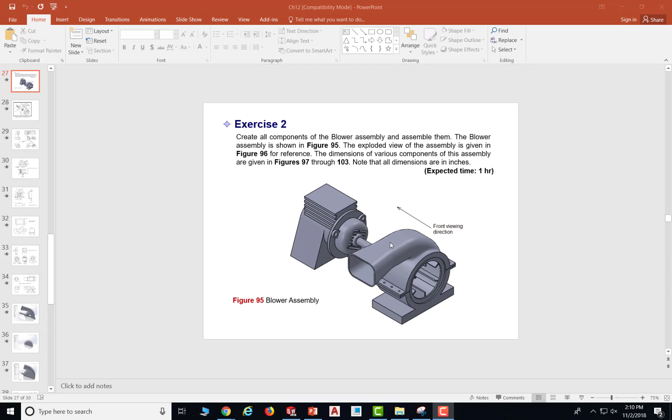Hello everyone. Now we are going to show you how to use SolidWorks to make this blower. This is chapter 12, exercise 2, and today we are going to show you how to make the upper housing, which is this part. So we're going to use SolidWorks to make this part. Once again, it's chapter 12, exercise 2.

Let's go to SolidWorks to take a look at the part. So this is the part we're going to make. And let's take a look at the steps.

So if I grab it up, first of all we are going to make this base. Then we're going to make this part. And then we're going to make the front part, which is this part.

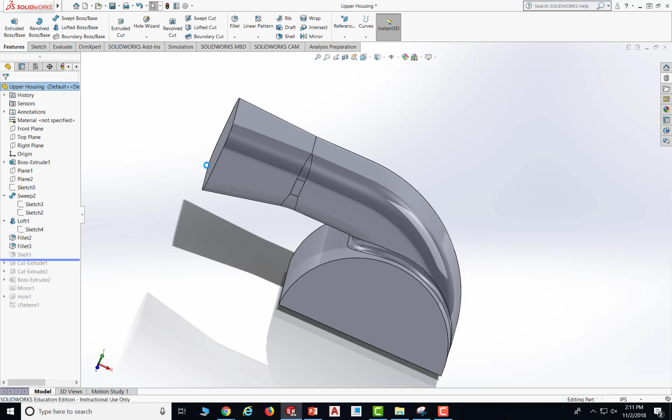And then we're going to create the fillets, so one here and another at the bottom. Then we are going to make the shell, one here and the other at the bottom. So that's shells.

Then we are going to do the extruded cut to make this part, as well as this part. And then we are going to do this part, and then we mirror it to another side. Then also put holes on each side and do patterns to get all holes.

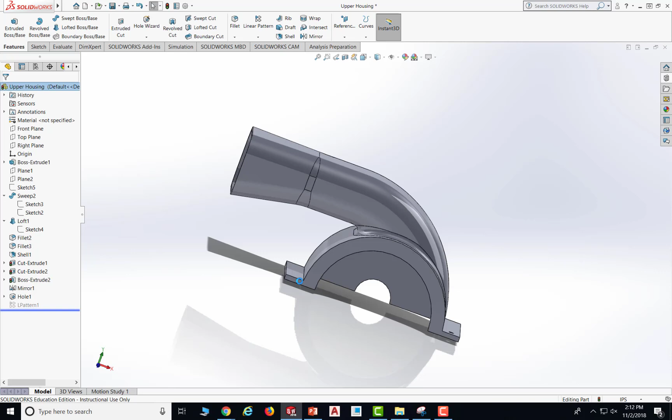So this is our plan. Then let's get it started. I'm going to close this part and start a new one.

Let's go to the dimension and take a look. So first of all, if you take a look at the dimension, this is 5.75 and the thickness is only 0.25. So what do you think about the units here?

Yes, it's going to be English units, not the metric one, because the thickness won't be 0.25 - it's too small. Also, the length of the blower won't be just 7 millimeters. So this is going to be English units. Make sure when you do units, you do English units for this part.

So let's go to SolidWorks and start a new one. Start a new part and say OK. And now we're going to go ahead and change the units from millimeter to inch. You have to do it right now, otherwise you can't change it back. So change to English units.

Then we go to sketch and let's get it started. So the first thing, we're going to make this part. And it looks like it should be on the front plane. So let's go to sketch on the front plane.

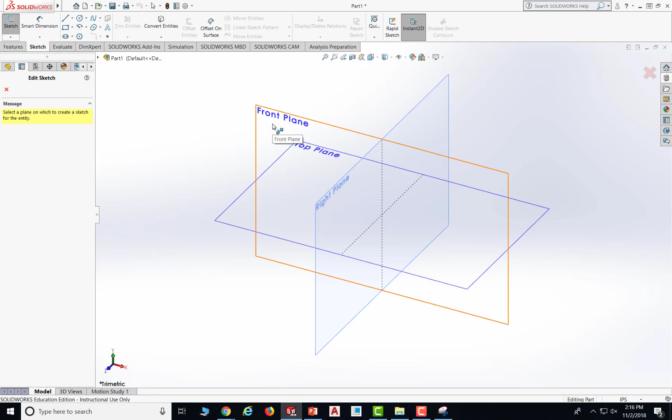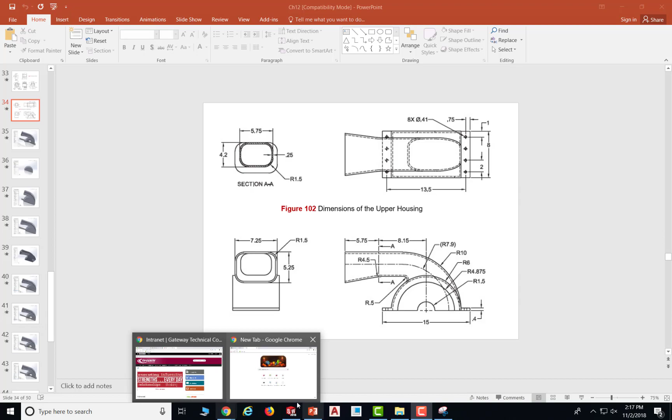Then let's draw a circle and figure out the dimension of that. So the dimension is R6. This is English units again, because the radius of this big part won't be just 6 millimeters. So let's go back here and give a dimension of 6. So the diameter is going to be 12 because the radius was 6.

And let's make a line to connect that, and then trim off the bottom part. But before we do that, let's save the work first.

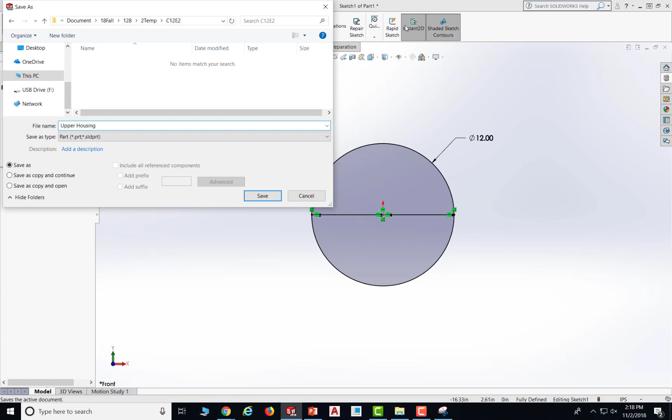So it's chapter 12, exercise 2. And the part number - the part is called upper housing. And save the part.

Now it's saved and also fully defined. Now I'm going to trim off the bottom part and say OK with that.

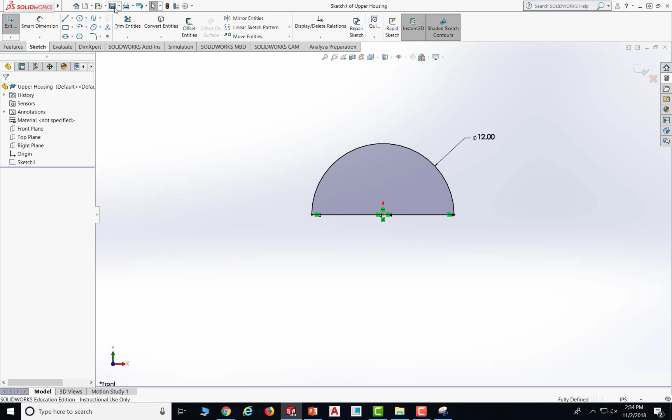Now I am going to extrude. Before I do that, save the work and go to extrusion and select the part. And let's look at the thickness, and go back to the slide.

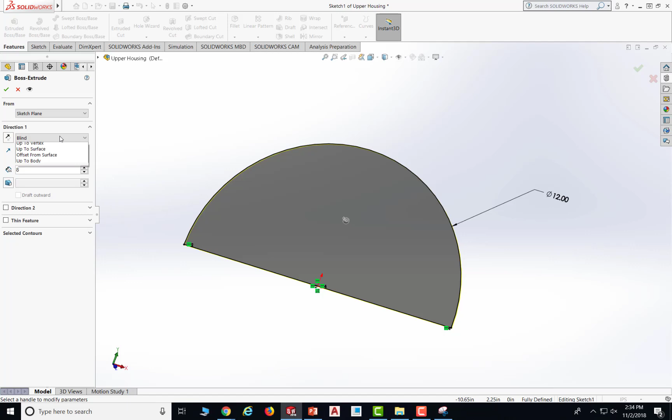So the thickness is going to be 8. Thickness is 8, and put it in the center plane, middle plane. And say OK with that.

Okay, and then next, let's see what we're going to do next. The next thing, we're going to do the top part. So for the top part, we're going to use a new function called the sweep. And after that, we're going to use a loft to do another part. So first is a sweep.

So in order to use a sweep, we're going to make this part first, this part with the basis. Then we're going to make this curve. So this part is going to be swept along with this curve. Now we're going to make this part and this curve.

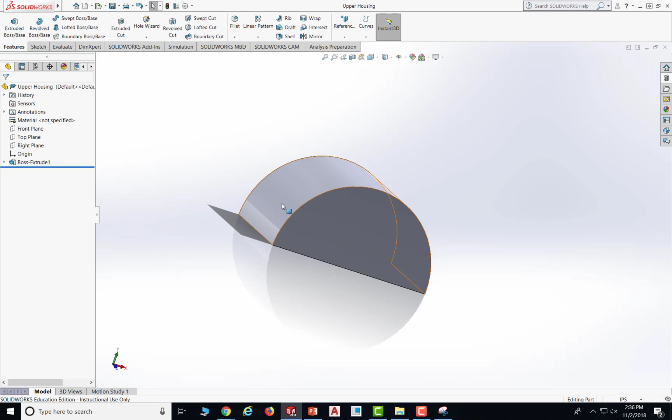In order to make this part, we're going to create a reference plane. Let's create the reference plane first. I go to reference geometry and select the plane. My reference is going to be the right view because the right plane is in the middle, so I am going to select that as my reference. It's on the other side, so I am going to flip the direction. And the distance - let's figure that out. The distance is 8.15.

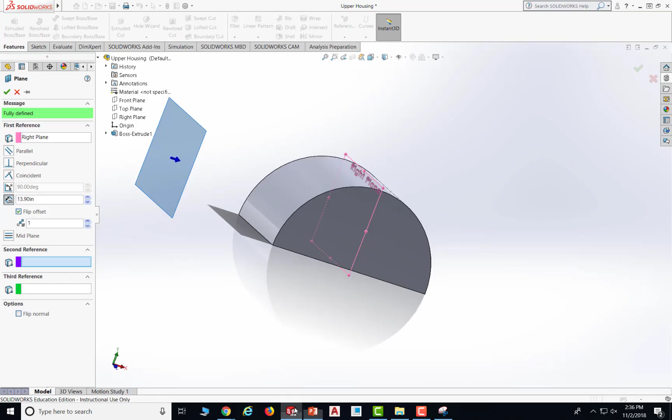So we go back here and put 8.15 as the distance, and say OK for that.

Now on this plane, let's make the square part. We're going to make the smaller part inside because this is the side view, so we see the inside and the outer side. The outer side is this part, and we are making this part right now. Let's look at the inside dimension: it's 5.75 times 4.2. We don't worry about the thickness so far because we're going to do the shell later. So we're going to put this, and the fillets are 1.5. Let's do that.

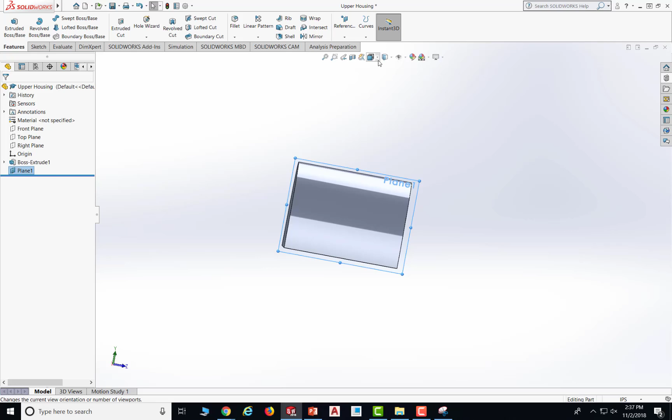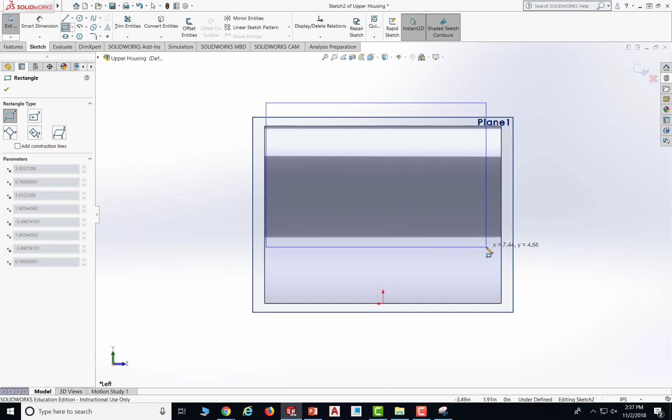Go back to the part. I probably want to use the right side, the left side view in order to see it better. Then I go to a sketch and select a sketch. This is the plane, and I make a rectangle and put it here. Now I am going to dimension the part.

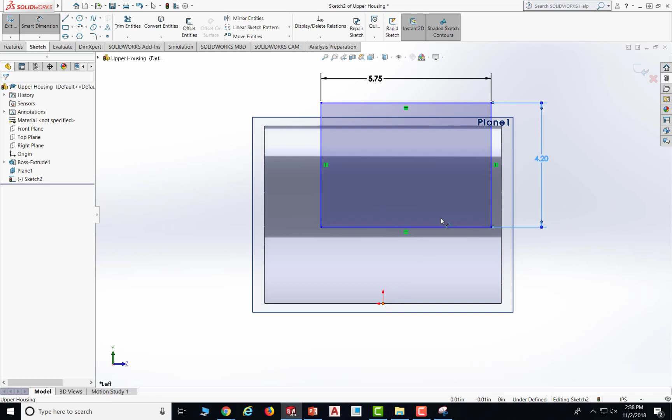So the top one is 5.75 and the height is 4.2, and the half of that, so from the origin to this part, is going to be half of 4.2, which is 2.1.

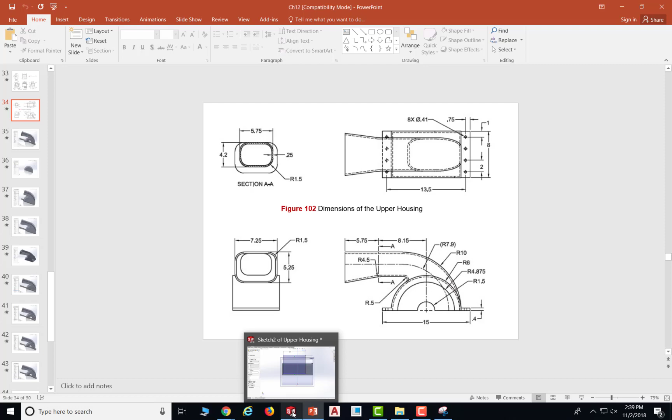Now we are looking for the distance from here to the origin. I assume it's going to be a radius of this circle, so here is an arc. I assume the distance from here to the bottom equals the radius, which is R10. Let's put a 10 there first, so dimension from here to the bottom is 10, and say OK with that.

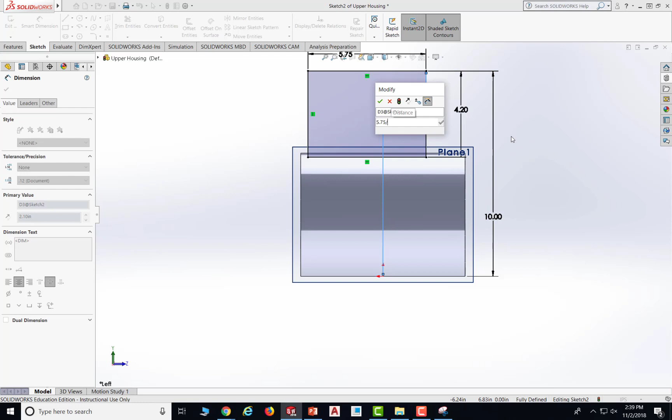Oh, this dimension I messed up. It's half of 5.75, so 5.75 divided by 2. Now it's in the center and it's fully defined. Then save the work.

Okay, and the next part we are going to make this line, make this arc with this line there. Like we said, the radius of this arc is 10, and the center is somewhere, but there's tangent at the end. Let's do that.

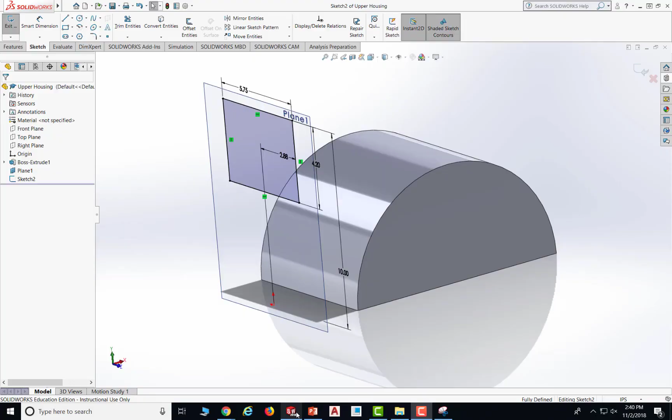I want to go to the front plane again. First I need to exit the sketch, then save the work. Then I go to sketch—it asks me to select the plane. At this time it recognizes the still sketch tool, so I am going to click around and go to features, try extruded, and exit that so I can get rid of the sketch tool. Then let's go back to sketch again. Yeah, now it allows me to pick up the new one.

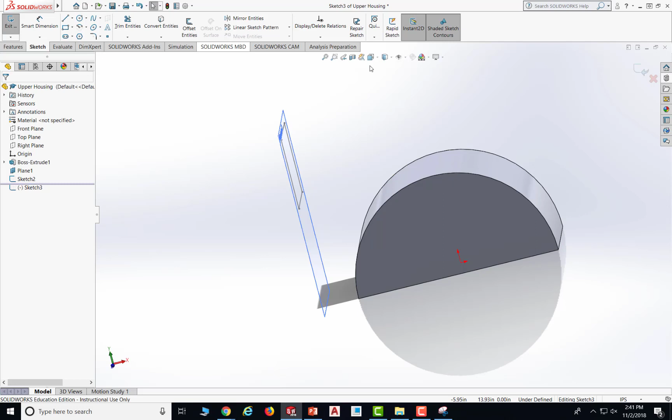I am going to pick the front plane again, then go to the front view. Then draw a circle—the center is somewhere on the point, so just randomly click one and make this tangent. See if it shows up... yeah, the coincidence shows up. That's fine too. Now let's give a dimension with 10 as the radius, so the diameter is going to be 20.

Now it's fully defined. Now let's trim off the part, see if it will work. Sometimes it doesn't, so let's see. So trim off the bottom one—as you can see, if I do that, the entire circle is going to be trimmed off. That's not what I want.

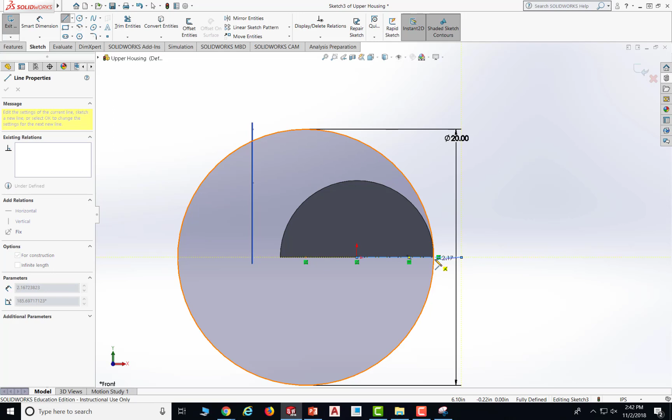Actually, they are looking for the intersection point here, which we don't have. So let's put a center line there, see if it will recognize. Say OK for the trim, then do a center line from here to there. Then we have one intersection point there, another should be there. Let's try it, see if it will work... center line. Yeah, it worked. So to there, then let's trim it one more time. Yeah, now it will work.

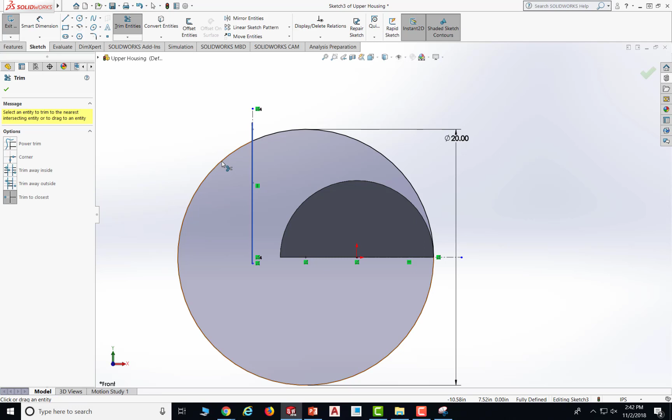So trim off—now we have an arc there, and say OK. Now let's draw a line that is tangent to the top, then maybe this point—make sure the horizontal relation is showing up. Then we have the line here, and the length is supposed to be exactly on the plane. So with that, I probably can delete this part. Go trim—yep, I can trim off this part, and I can trim off this part as well. So trim that off and say OK.

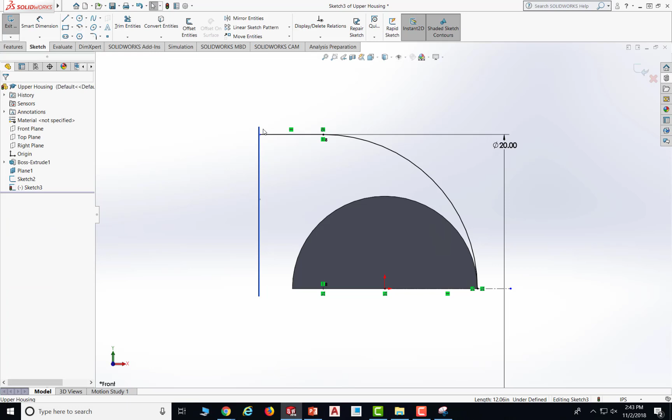With that, I probably don't need the center lines anymore, so I'm going to delete it. Now the sketch looks good, and it's underdefined—I guess it's probably because of that point there, it doesn't recognize. Let me save it first, see if that point is still blue. Go to the sketch.

Okay, I'm trying to go out of sketch first, then go into the sketch one more time. Let me hide that plane. Okay, so this is blue. Now let me drag it around and see if I can recognize it. Now it's black, great. Then save the work.

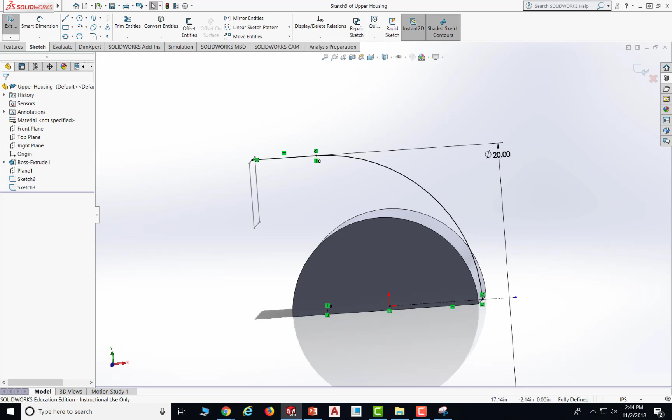Now I have not put the fillets there yet. So I am going to go ahead and put a fillet. Select the sketch tool and see if I'm on that sketch, and do a fillet. It's asking me to select the sketch, so let's select the sketch tool so we can get in there.

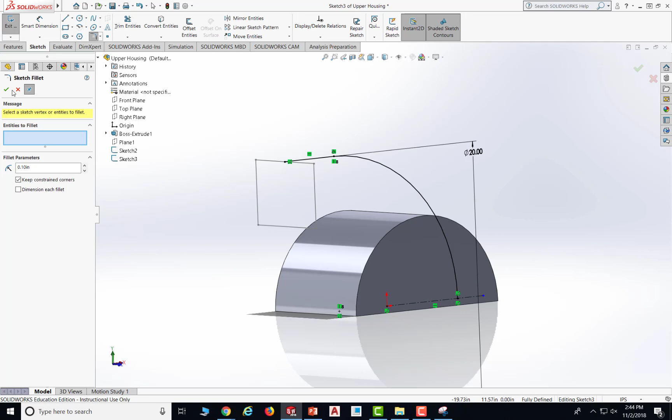Okay, didn't pick, so let me go out first. Then go to sketch, select the plane. So I'm going to select this line, then it was here. Then I add a fillet, so the radius is 1.5.

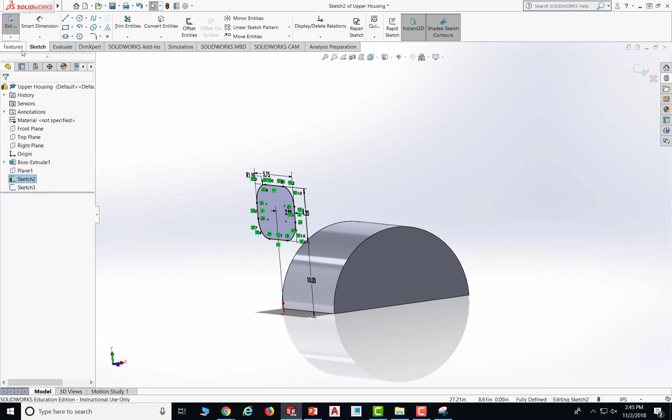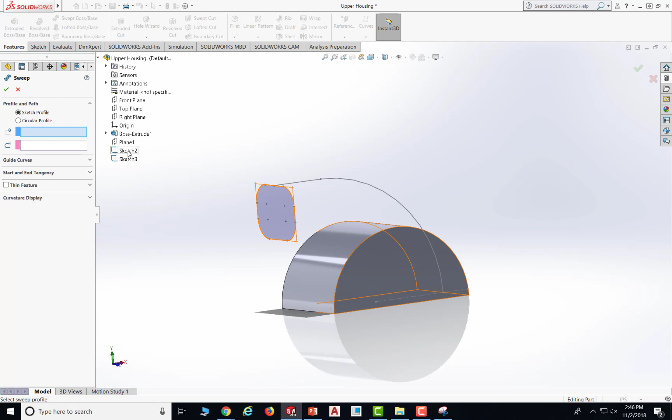Now I could do the sweep. So I do sweep here and select the shape, the profile, which is this. This is on sketch 2, so I'm going to select the entire sketch 2, and the path I am going to select the sketch 3. Then this is what I want. And notice that by doing that, I am going to have all this.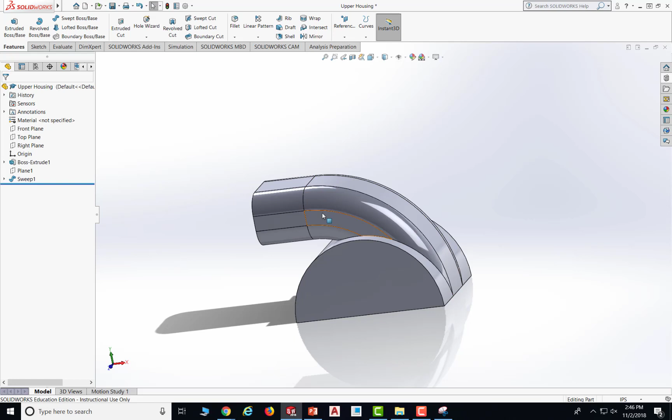Lines here, intersection lines. So the original picture, it does not have that. The reason of that is I use a fillets tool. So in SolidWorks, as long as you use fillets, all these lines will show up. So if instead of fillets you do the arcs and trim off, then those things are not going to show up. So anyway, let's keep it in this way, and let's do the next step.

So the next step, we're going to create this part using a loft tool. Before we do that, we would need to create the sketch of the top part here. So the dimensions, they are here. It's 7.25 times 5.25. So let's go ahead and create this sketch first.

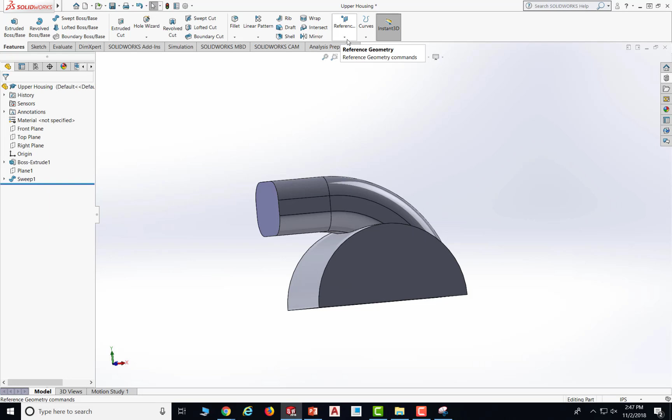And the distance is going to be from the side right view, the distance 5.75 plus 8.15. So let's go to the sketch and create a new reference plane, based on the right plane, with the distance 5.75 plus 8.15, and it's on the other direction. So I am going to flip it to the other side and say OK with that.

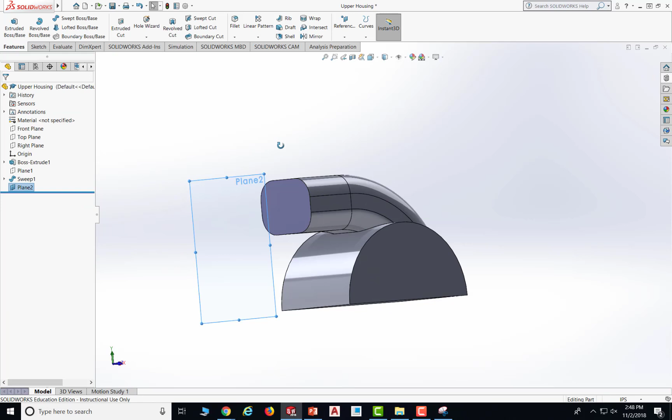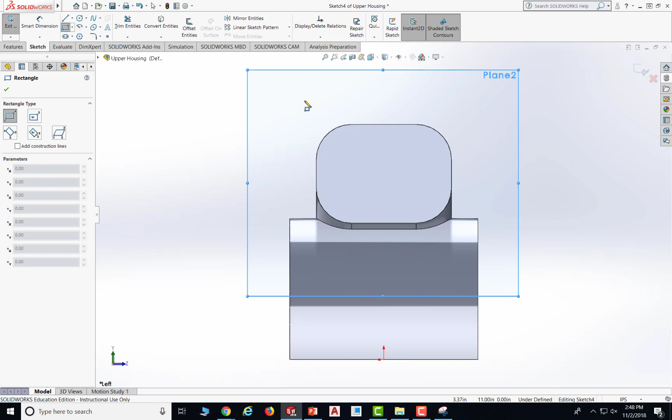And then I'm going to make it bigger so I can put the part on there. And I go to the left view, and I'm going to draw another rectangle. So go to sketch, and it automatically recognizes this plane. Now I select the rectangle and draw it in this way.

Now I'm going to give it dimensions. So the dimension is 7.25 at the top and 5.25 as the height, and a half of that, from this point to this point, is a half of 7.25. So 7.25 divided by 2 is this number.

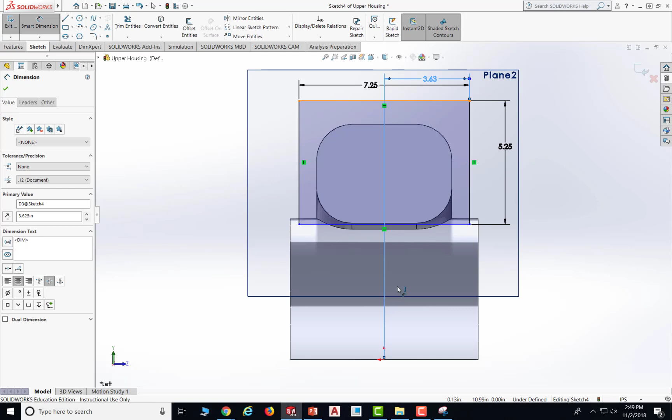And the height, those two are supposed to be lined up. Okay, so the height from here to the bottom is going to be 5.25 as well. So let's go back here. So the height from here to the center, excuse me. So the height from the top to the bottom is going to be the radius of this part.

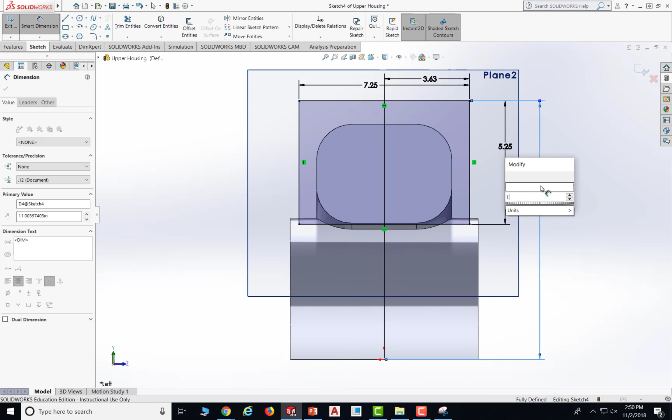So it's going to be 10. Go back here, and the distance is going to be 10. And say OK for dimension. Now they're all black and fully defined. Then let's save the work.

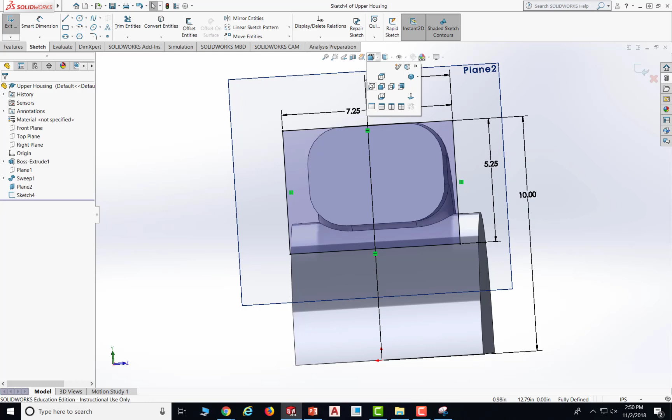Then this is the plane. And now let's put fillets on there. Let me go back to the left view again and put fillets there. And this tool is 1.5 again, so that's 1.5. 1.5 here and 1.5 here. Say OK for the fillets.

And the fillet here. Then we have two planes. And let's save the work. Then we're going to use the lofted tool. So it's hidden because we're still in the sketch. So let's exit the sketch first. Then now this tool is available.

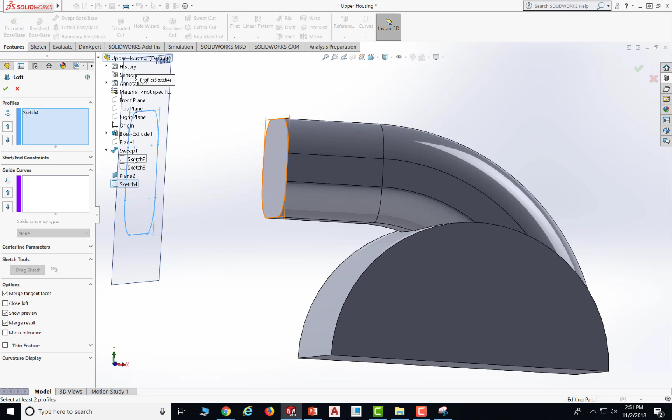So we select this tool and sketch 4. OK, and we also need this sketch, so let's go select that as well. Let's see where it is. So sketch 2, and it's recognized. Let's say OK for that. And this is our part. Looks right so far. And now we don't need this plane anymore. Let's hide that. So this is the part.

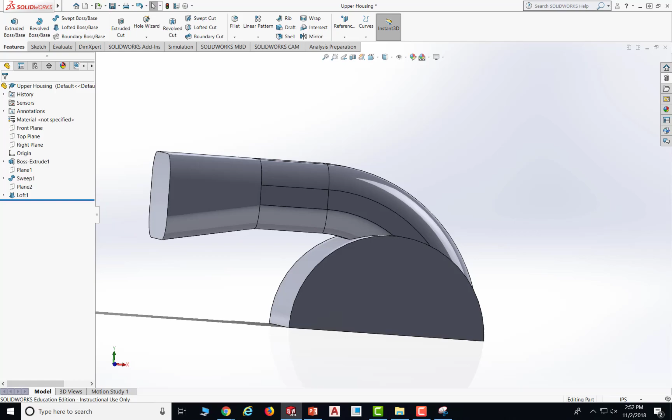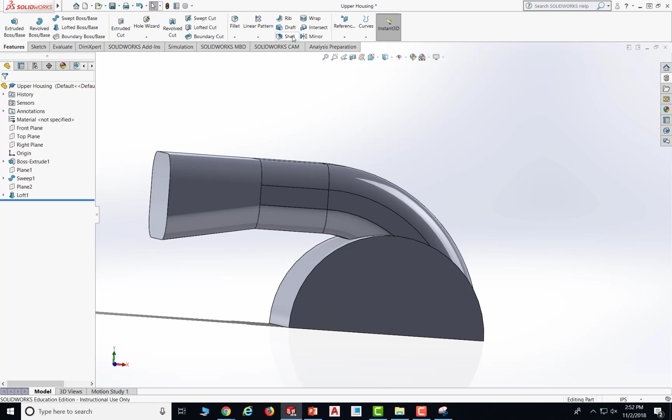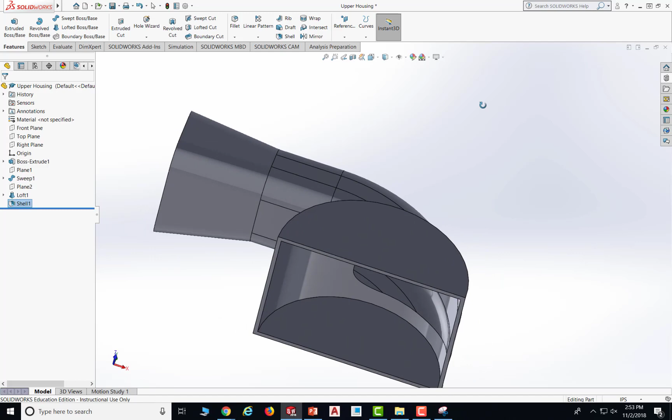Now let's look at the next step. We're going to make the shell at the bottom. So we've done here, and we're going to make a shell, and the thickness of the part is going to be 0.25, a quarter. So we go to SolidWorks, go to shell, select this part as well as the bottom piece, and give a quarter, 0.25, and say OK with that. And this is the shell part that we got. Save the work, and see what's next.

The next one is going to be put the fillets there. So we have a fillet here, and we have a fillet here. Let's figure out the dimension for the fillets. The fillet at the top is 4.5, and the fillet down there is 0.5. Okay, let's go ahead and do that.

So the fillets there, let's go to fillet and select those lines. This and the entire one, okay, recognized. So let's select the loop. Yeah, looks right. And give fillet, so it's 4.5. Let's look at the full preview. Yep, this is exactly what we're looking for. Let's say OK for that.

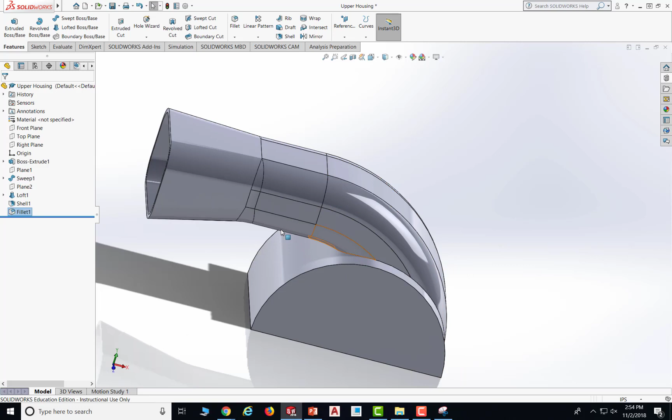Now let's do another fillet here. So go to fillet, and we're going to select this. Oh, it's way too much. Let's do this. Yep, looks right so far. So let's give a radius of 0.5 with the full preview. Probably won't take. Maybe there are two edges selected. Let's apply first, see if it'll work. Oh, it's a FilletXpert, that's why.

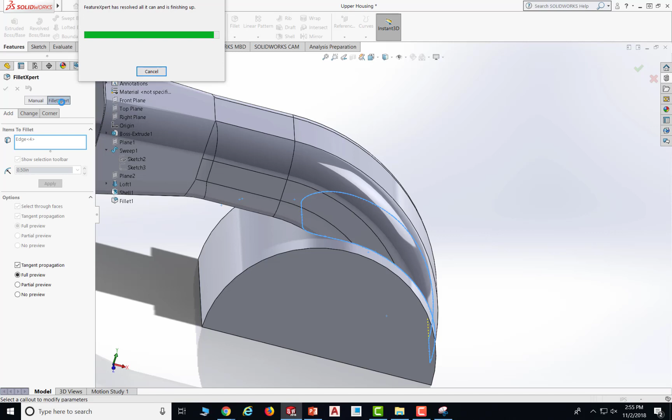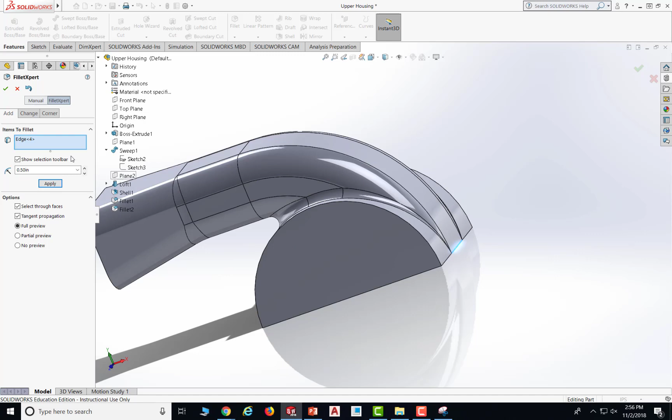Okay, let's wait, it has not resolved all the features yet. Okay, then let's take a look. Looks right so far, then we just accept that. If it does not work, then you could go back to the menu and do the fillets again. Right now it looks right to me, so I just exit and get the fillet there. Let's look at the next.

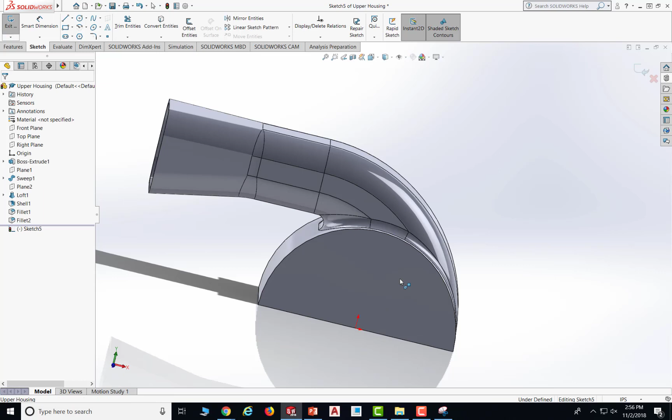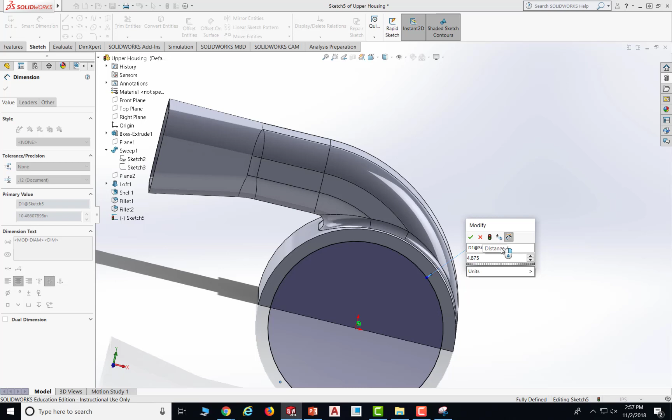Now we're going to cut this part. Let's go back here and go to sketch, select the surface, this part, and do an arc, from here to there. Let's look at the dimension of that part, it is 4.875. Go back here, smart dimension, 4.875 times 2 because that was radius, and this is the diameter, and say okay with that. Now we have to have a closed shape, remember, so we close the shape here and trim off the bottom piece, say okay with that.

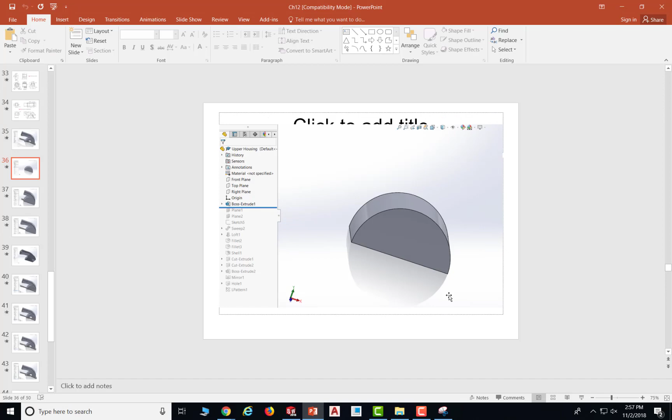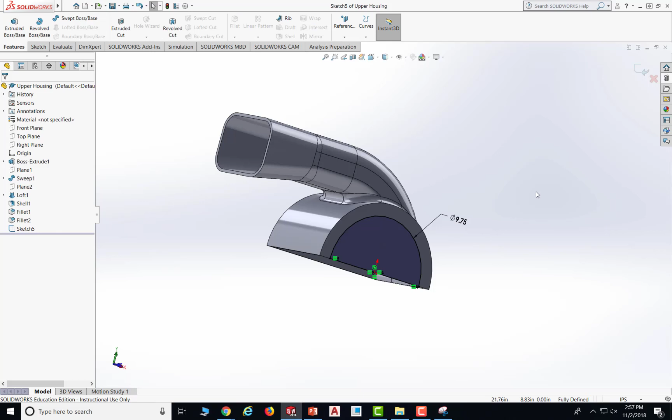Then let's go back to the part, see what it should look like. Okay, so it's not all the way through actually, so let's fix it. Save the work first, then let's go to features and do extruded cut. It's not all the way through like we said, so we probably want to go up to the next. Okay, so only cut it here up to the next, and say okay with that, and we got this piece so far. Let's look at what's going to be next.

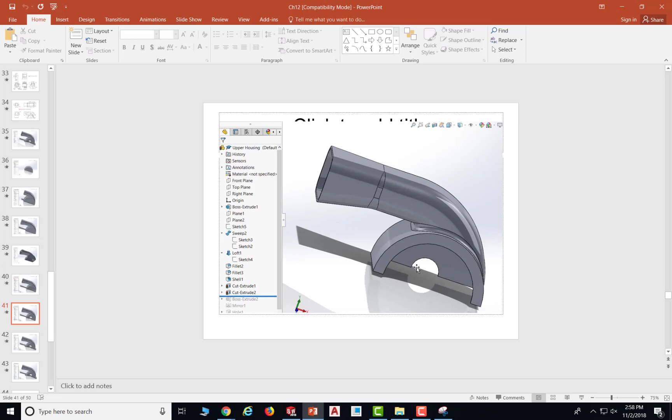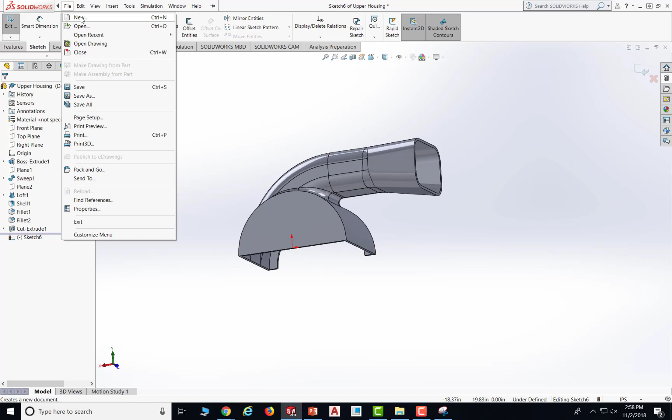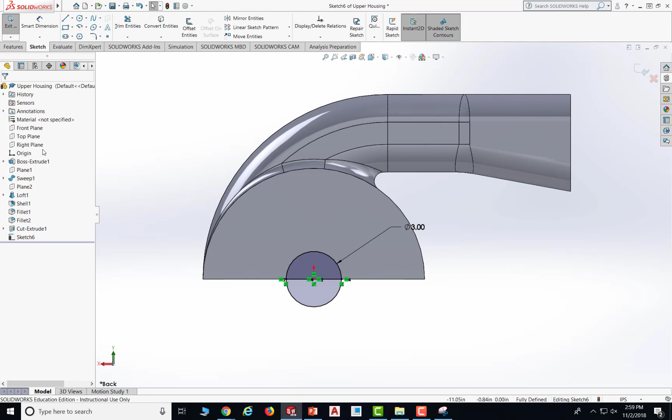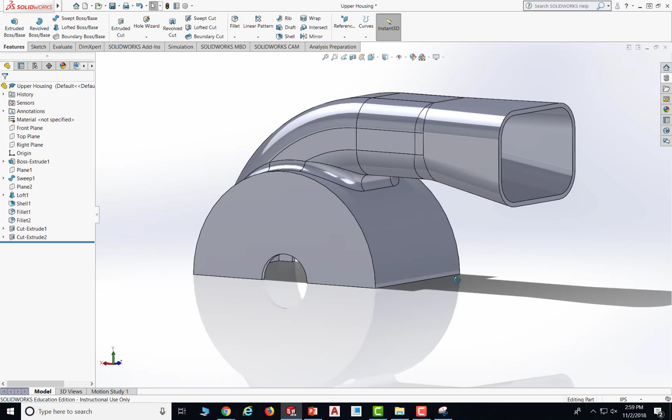So the next one is making the inside one there, and let's look at the dimension of that as well. The dimension is 1.5, let's do that. Go to another side, go to sketch, select the plane, and make a circle. Make a circle, say 1.5. So I probably want to go to the back view, and dimension that as 1.5, so the diameter is going to be 3, and say okay with that, and close the shape from here to there, and trim off the extra piece, then say okay with that. Then go to features and extruded cut, and that direction once again does not go through, so we are going to go up to the next and say okay for that, and we got this piece.

Let's look at the next. So the next one is to make the two side parts. We are going to make one and mirror it. Let's go back here, and now I probably want to select this plane as my new plane. So I am going to sketch, select a plane. Probably want to select, okay, let me see if that was my top plane. Yes, it was. So select the top plane, then probably want to switch to the bottom view. Okay, and make that part.

Be aware, this is a circular surface, not a flat surface. So I probably want to make an extra inside, so when I extrude later, it won't have a gap in between. So I am going to actually make the part land up here instead of right on the edge. Go to the bottom view once again, and go to lines, and probably want to start here. Okay, it doesn't... okay, recognized, good. And go until here instead of the outer one, because when I extrude later, I don't want to have a gap in between.

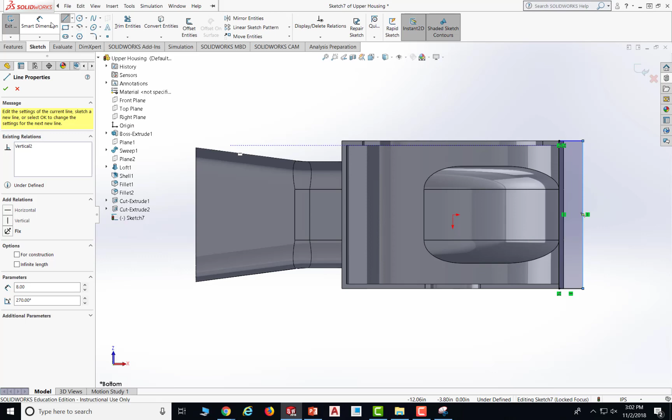So now let's take a look at the dimension from here to the center. Go back here, it's 15 total, so half of that is going to be 7.5. Let's give a smart dimension from the line to the center of that part. It is the origin. Then it's supposed to be 7.5, and say okay with that.

Let's look at this line. It's blue, so let's drag it. Oh, I'm missing a relation, it's supposed to be vertical. So add a relation here. This and this is supposed to be... one more point, delete that. Not vertical, let me redo it. Select those two lines, I'm sorry, perpendicular, and say okay with that. Okay, so they're all black right now, fully defined.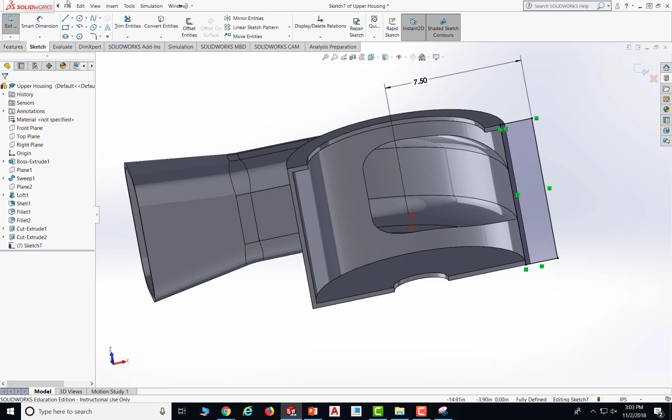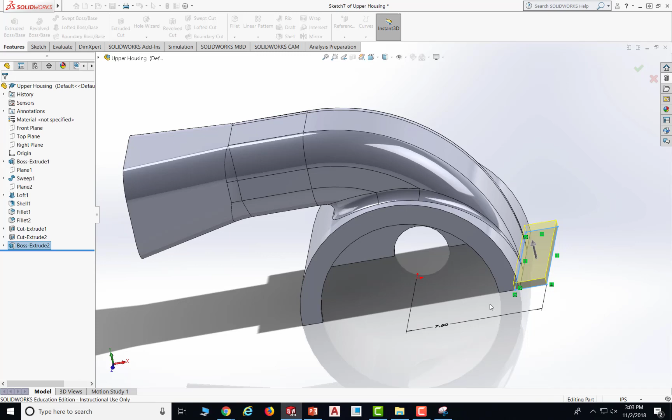Then save the work. Let's extrude, see if they'll work. Go to features, select the sketch first, then extrude. The thickness is going to be 0.4, 0.4 as the thickness, and say OK. Now we don't have any gaps here, which is good. Now let's look at the next step.

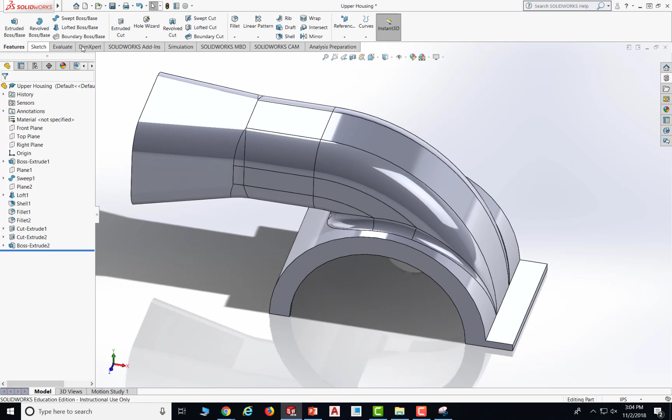I am going to make holes first, then do patterns for the mirror for both of them. So for the holes, let's look at the dimension. The diameter is 0.41, so let's go back here and put a diameter. Go to hole wizard, select the simple hole and put the diameter 0.41, which they don't have. So let's show custom sizing and put 0.41.

0.41, and through all works good for me. I uncheck this because I don't have any of them. 0.41 is millimeter, does not look right. Oh, I need to switch to ANSI inch instead of ANSI metric. Okay, inch does not have the size, so I am going to custom sizing. I am going to put a 0.41 and uncheck this, and I don't need this either.

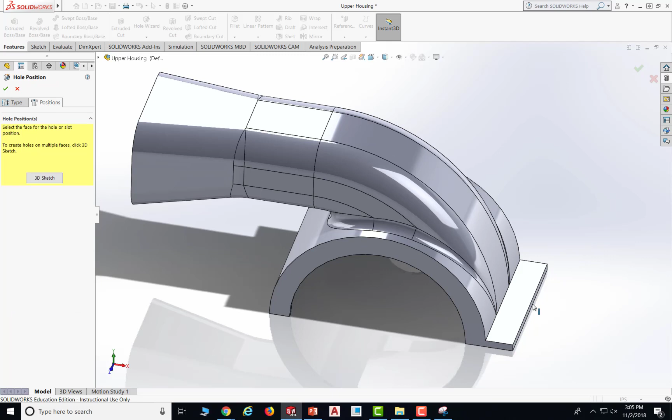Now I go to positions, select the surface, and put one hole here, and now I am going to dimension the hole. Let's find out the dimension. It's 0.75 on the side, and the half of that is... okay, 0.75. Now let's figure out the vertical one. Vertical one is 1. Let's go back here, the dimension from this point to this side is going to be 1, and from here to there is 0.75. Say OK. Now the hole is fully defined, and say OK for the hole.

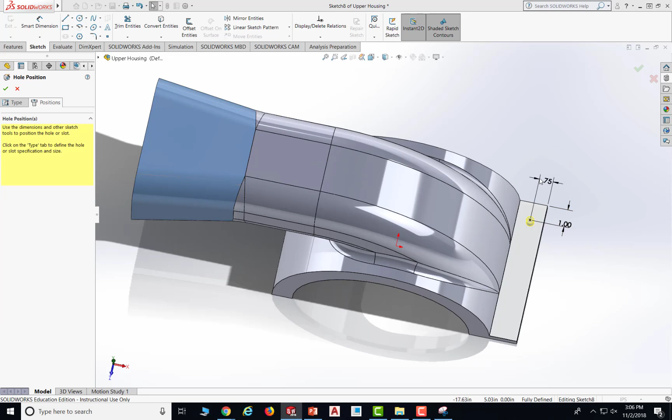Enter the number greater than 0.0 and less than... yeah, I think I did. 0.41, what's wrong with that? Oh, maybe take out inch, let's see. Yeah, still didn't like it. Okay, so let's check the options first to see if it'll work. Still doesn't. Try blind.

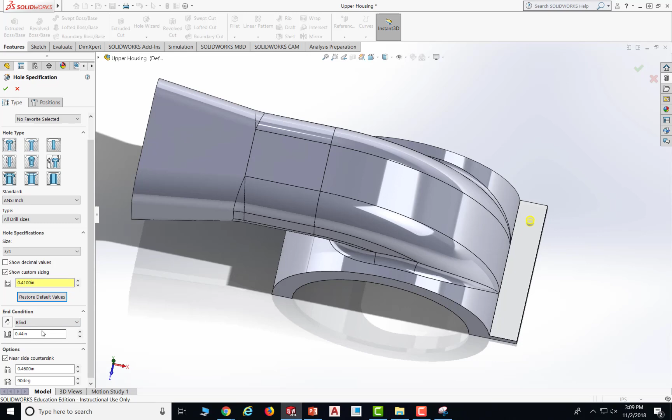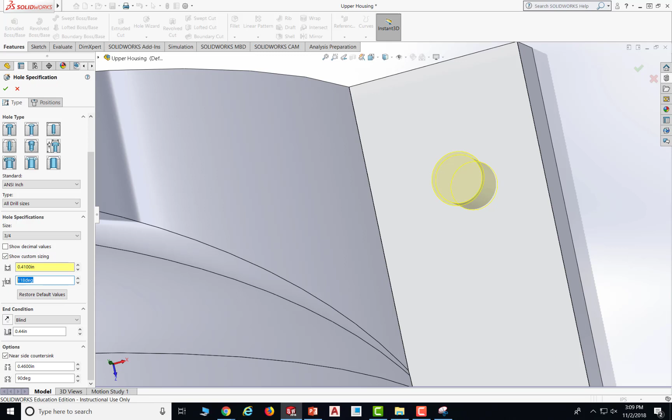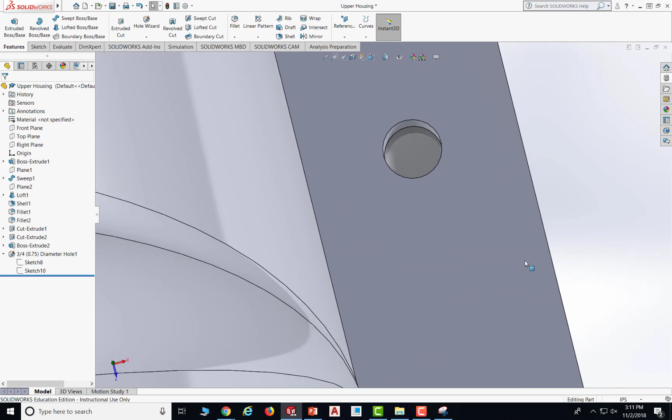Okay, it worked, so let's look at the hole. Looks like a countersink, okay, let's go back and fix it. So I don't need the degrees there, so let me put 180. Let's go back and fix that. Okay, through all, what if I uncheck this? Okay, looks right so far.

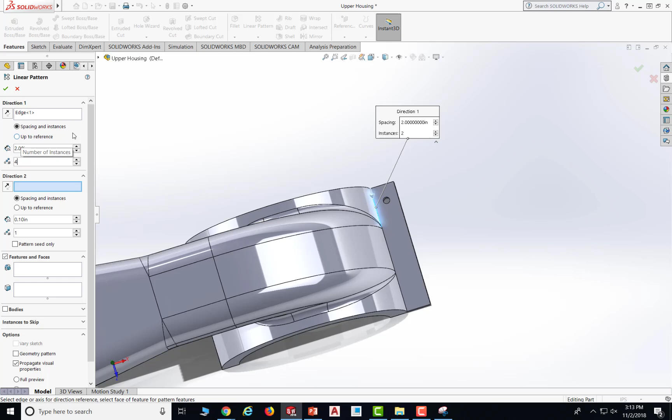Now I am going to do the linear pattern for the rest of the holes. Let's look at the dimension, and it's 2 for each. Let's go back here and go to linear patterns, and select the direction, I'm going to select this edge. And the distance, I'm going to put 2 there, and the number of holes, I'm going to put 4. Let's look at the preview. So the edge distance... oh, okay, I am going to delete that and select this edge instead.

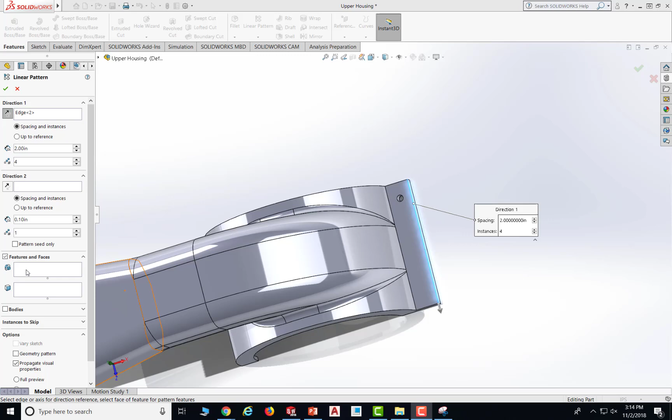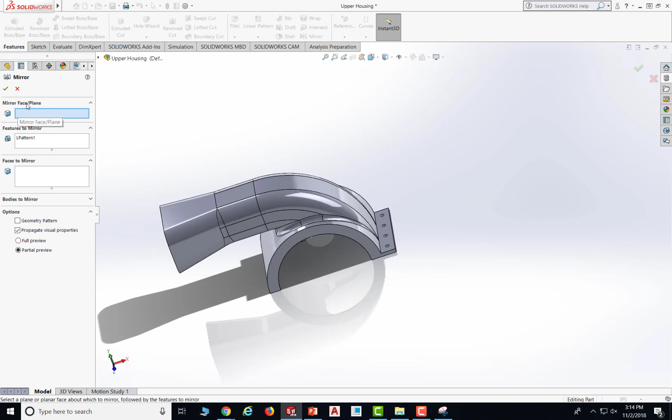And select the feature, which is the hole. So the hole here looks right, and say OK for that. Now let's do a mirror to get the whole part. Before we do that, let me check the plane. Yeah, I can use the right plane as my mirror plane. Then save the work first. Then go mirror, the surface, the plane is going to be the right plane, and the part is going to be the entire part, so not only the holes but also this part. Looks right so far, and say OK.

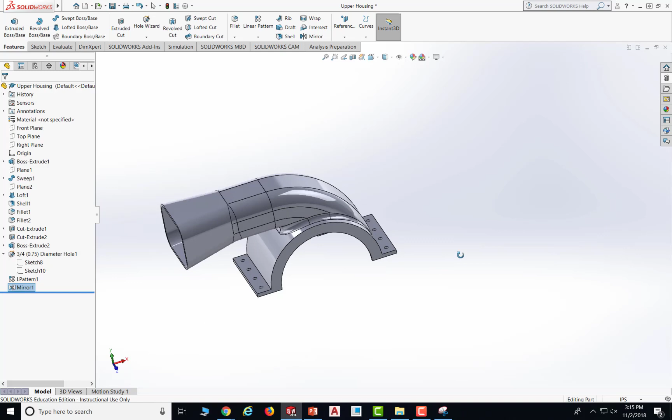Okay, so I got this part, and let's look and see if we have completed. Yep, looks like that's all we have. So let's put it into a good view. Then save the work, then we're all set for this part.